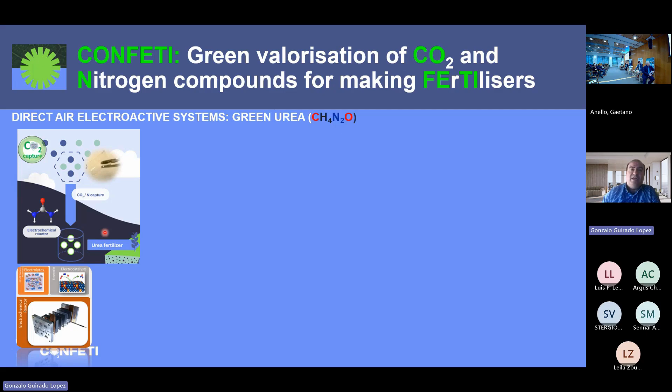So when the urea is formed with the electrolyzer, we plan to deliver this urea into the field. But before that, the idea is to trigger the electrochemical reactor using renewable energy sources. In this case, we select soil fuel cells. So we will collect the electrons from the bacteria, and with these electrons we will trigger the electrochemical device, produce urea and deliver it directly into the field.

Since it is known that not all the urea that we deliver to the field will be absorbed by the plants, we are designing a recovery system, which in principle is based on solar photocatalysis using these CPC solar photoreactors that Ilaria explained yesterday morning in the session. And for doing that, we select different photocatalysts and different materials. So at that point, we were able to make the first portable CPC photochemical reactor using sunlight. With this reactor, we recover the excess of nitrates from either leachates or agricultural wastewater, and then we irradiate with solar light and convert this excess of nitrates into ammonia, and then we can have two uses of this ammonia.

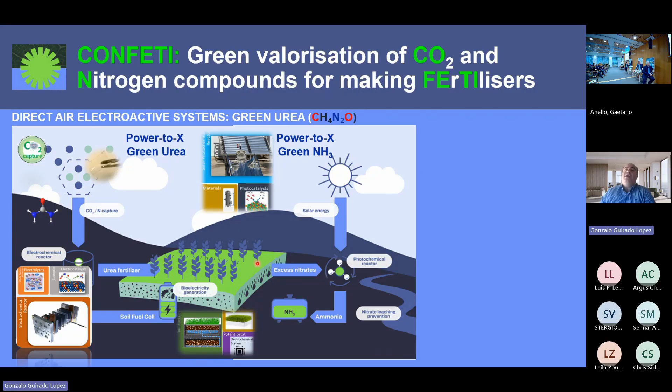Either we can just save it, or we can directly apply it to the field in order to use this as fertilizer. For doing so, we have a very nice team and very good partners, and they are doing a great job.

So we have partners from different countries, as you can see here, from 5 different countries, from Spain, France, Italy, and Belgium. And also we have an associate partner from the United States, from Iowa State University. Most of the partners are involved in different stages of the project. For instance, the electrochemical reactor that we present is developed by University of Antwerp, by the LCAP Group, with the help of CNRS and UAB.

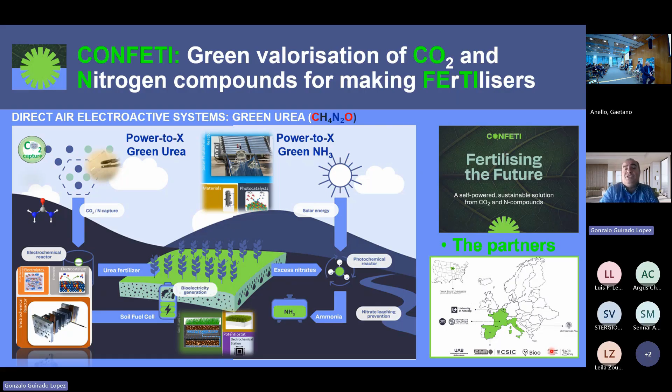The photochemical reactor is being developed in the Plataforma Solar de Almería with the contribution of the UAB researchers, and the microbial fuel cell is also performed by UAB, CSIC, and Bioo, which is a company specialized in this type of technology. So what do we expect at the end?

At the end, we want to try to produce an autonomous system to deliver and make nitrogen fertilizers. We want to do it using renewable sources. So we selected microbial fuel cells, as I pointed out before, but also, if it's needed, we will use solar panels in order to get more power. Now the use of solar power is quite a common technology in agricultural practices.

With the design of these different photo and electrochemical reactors, we will try to minimize the use of raw materials. And the main idea that we will focus on is to produce and deliver the fertilizers in situ. If we are able to do so, we will be able to reduce a lot of costs related with packaging and storage, and also with transport and spreading. So this is more or less the overview of CONFETI.

I think that along these 2 days, you have already seen how these technologies have been developing in these past 2 years, and we hope we will have a fully equipped system by June, July, before the summer holidays.

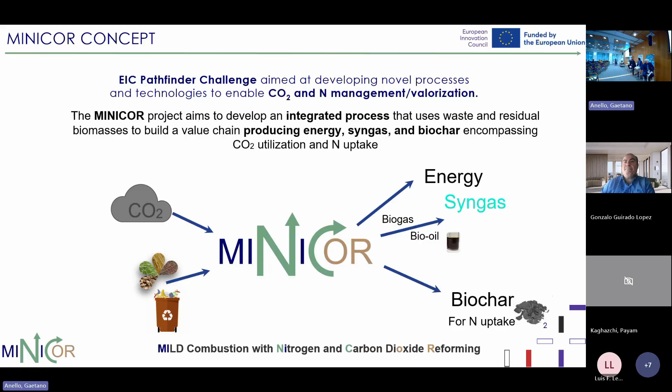What is the idea behind that, or the concept, how can it be developed? It is developed in this scheme. We start from carbon-based feedstock, also manure and so on, and we pyrolyze this feedstock with CO2, and we have, of course, 3 products: biochar, biogas, and bio-oil. Biogas and bio-oil are intermediate products, because it's very difficult to use bio-oil directly, so we process it again with non-catalytic dry reforming.

So we designed it with utilization of CO2, heating the process by utilization of biogas by means of MILD combustion. Later I will tell you more on that. And so we obtain syngas, maybe energy. On the other side, we have biochar that will be activated with CO2 to be utilized for nitrogen uptake and to be used, for example, for soil carbonization and nitrification. This is our first point that we described in the proposal.

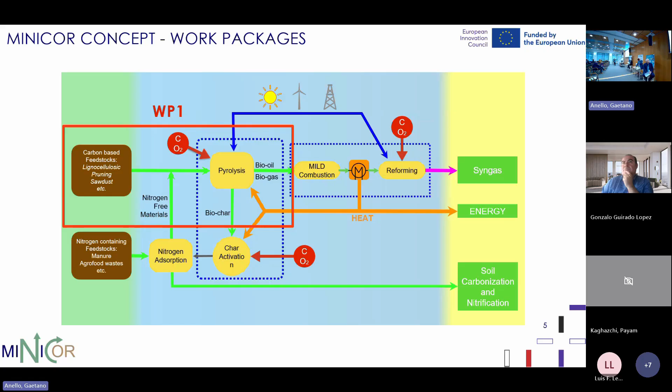But biochar, now we are looking at biochar for many other applications. So the project is divided into different groups. The first one is focused on pyrolysis, so looking at the effect of, for example, temperature or carrier gas on the products. Then on mild combustion and reforming.

And it is very important here the coupling of these two processes, because mild combustion allows us to use very low calorific value gases coming from pyrolysis without further upgrade. So the coupling of these two processes is very relevant in this case. And the other two WPs are focused on the modeling of both the pyrolysis process and mild combustion and reforming, both from a kinetic point of view and a system point of view.

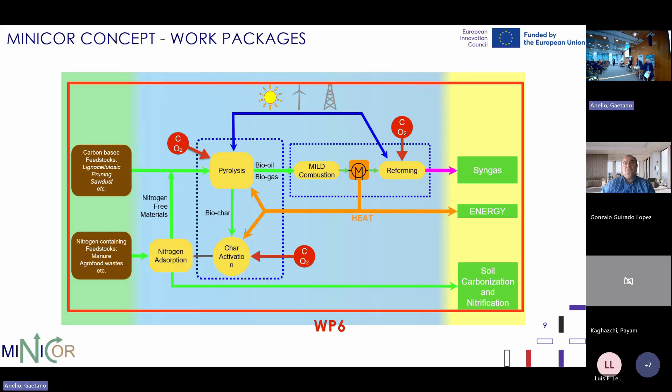And then there is WP5 for the characterization of biochar and functionalization, let's say activation of biochar. And as discussed this morning, we have WP6 late in the project, so we have not yet started that, for life cycle assessment analysis. So, summarizing the MINICOR approach?

Because we have the co-production of syngas and biochar using biomass residue, it is an efficient process with respect to resources. There is an energy integration, I mean that we aim to reach a self-sustainable process. And of course, there are some environmental advantages with carbon sequestration, CO2 utilization, and soil amendment.

From a technological point of view, as I said before, the integrated process of mild combustion with dry reforming is very important, giving us the opportunity to use very low calorific value gases. The system is flexible. I mean, we can optimize the process and maximize the characteristics that we require of the biochar or the syngas.

The other point is that we do not use critical materials; this is why we chose non-catalytic dry reforming. So that's all. Thank you.

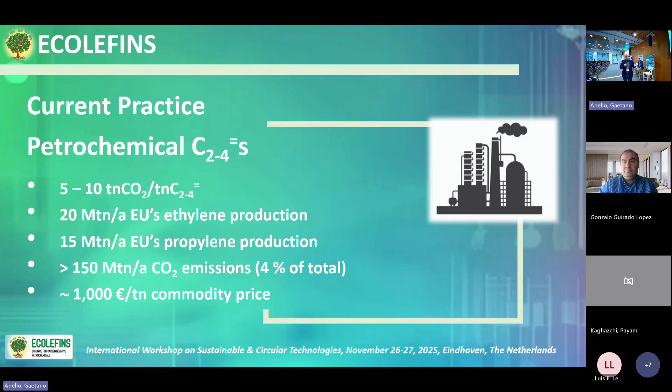So we are feeding CO2 at the cathode, and we are feeding water at the anode. And by applying a certain voltage or current, we can remove protons from the water and feed the protons through the ceramic electrolyte to the cathode, where they will meet CO2, and hopefully give light olefins, but also some other products.

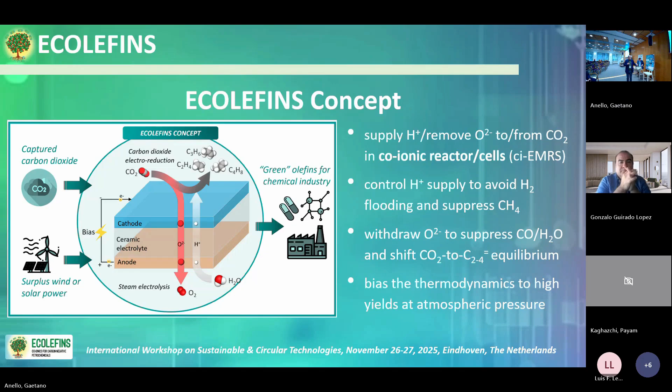So our long-term impact, if this is a successful technology, and we hope that it will become one, is to decouple major petrochemicals from petroleum and to expand light olefins production to end users, because this device can be applied in small scale applications, but also large scale applications. This is a modular technology that is easily scaled up.

At full deployment, if we imagine using this technology to replace the common practice for the production of light olefins in Europe, we will save and capture up to 20% of industrial CO2 emissions.

From some first calculations, we compared our approach to another low carbon approach, which is to have a separate water electrolysis unit and a separate compressed reactor, and we calculated that we need half of the electrical energy compared to that alternative.

At full deployment, we will need more and more renewable electricity. From first calculations, we need an increase of 25% of the total EU electricity demand. So our concept matches very much with the electrification of industry.

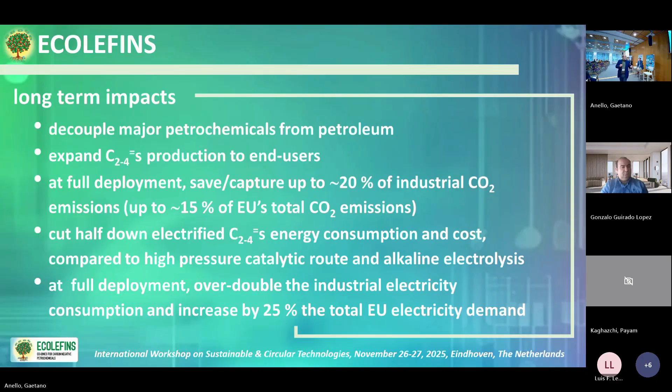This concept is planned to be realized by a wonderful team. We are 8 partners from 6 different countries. From Greece, we have CERTH, which is the coordinator, and the Technical University of Crete, which deals with catalysis. There's Hellenic Energy, the biggest petrochemical industry in southeastern Europe, Politecnico di Torino for modeling, Jülich, the University of St. Andrews for the electrodes and co-ionic electrolytes, the University of Groningen for the anodes, and Elcogen, a high-tech company from Estonia that builds the stacks we want to build in this project. So what we've done so far, and what we think are the main breakthroughs up to now...

We have developed single-phase and dual-phase co-ionic electrolytes. This means they can conduct both protons and oxide ions. This development has been guided by DFT modeling, where there is a poster in the other room from Severin Kufer from Jülich. They suggested substituting scandium into the standard BZCY proton conducting electrolyte, and we verified experimentally that we observe the desired co-ionic conductivity.

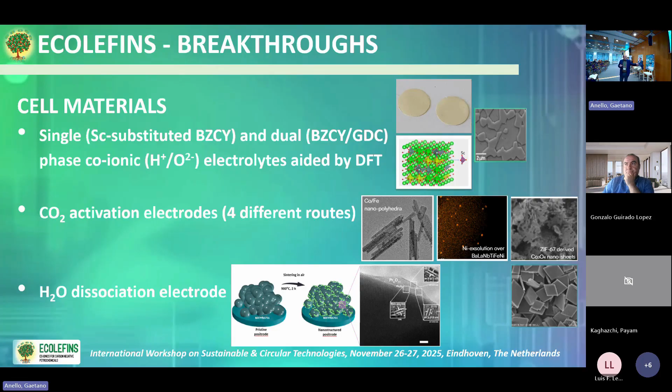Finally, we have 2 CFD simulation studies. You saw the presentation by Andrea Morenti, in order to build a short stack of 2 to 3 repeating units. And what we are also proud of is that the Jülich partner has produced, for the first time I guess, 5x5 co-ionic ceramic planar cells. This is very interesting and very important for our project.

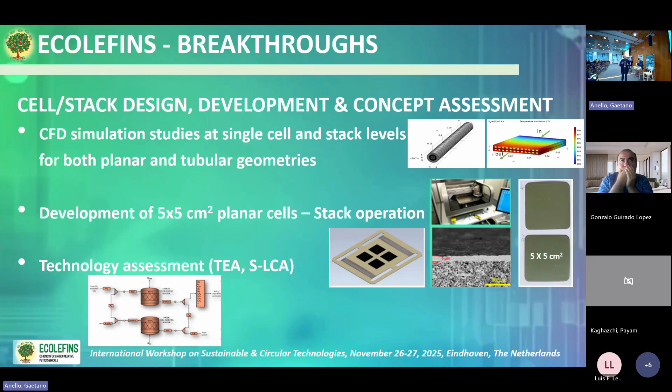And of course, the last work package deals with the assessment of the technology, which includes the techno-economic assessment and the life cycle social and life cycle assessment.

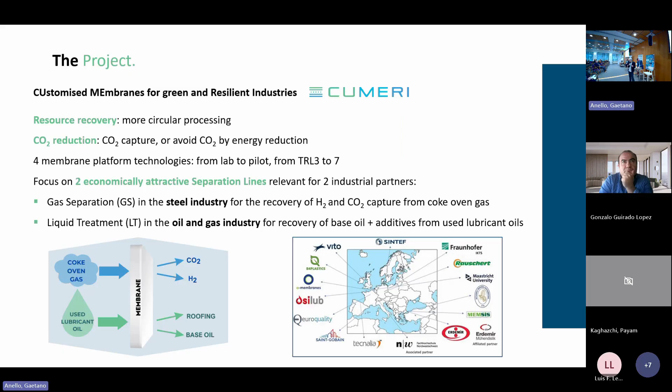Okay, let's take a bit deeper look at the two lines and the technologies I'm talking about. For the gas separation line, we intend to use the coke oven gas coming into a membrane unit with ceramic membranes that will recover the hydrogen, which can be reused for the reduction in the steel factory.

Then we go with the retentate to an oxy-combustion, and this produces a gas with quite high amounts of CO2, which is perfect to go into polymeric membrane modules for the CO2 capture.

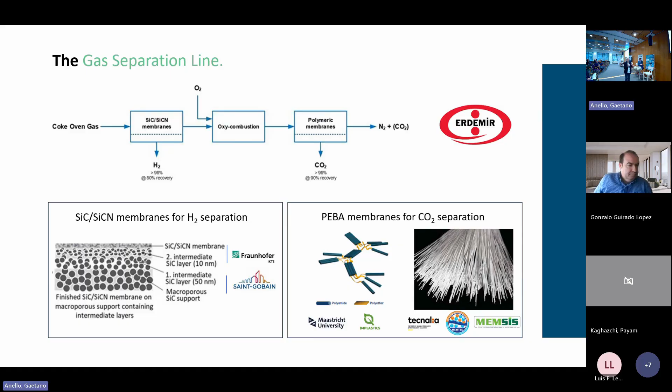You see the developments on the silicon carbide nitride membranes for hydrogen separation. It's a collaboration between Saint-Gobain, who develops the membranes, and Fraunhofer IKTS, who develops the top layers of these membranes. For the polymeric membranes, we have Tecnalia working together with the University of Maastricht for the tuning of these polyether block polyamide membranes, specifically for CO2 capture. They also want to bring them into hollow fibers instead of flat sheets, to profit from this design.

For the liquid line, we are working on used lubricant oil that is nicely collected in Europe. We thought first that we needed a pre-treatment, which turned out afterwards not to be necessary. So we remove the water in the UF plus membrane extraction steps afterwards.

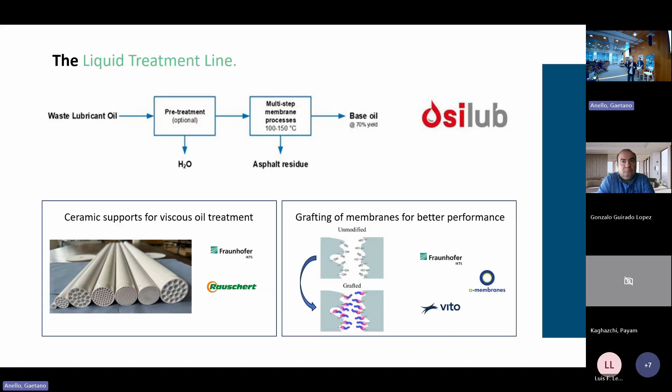We have been looking at the support materials from Rauschert, and we can tune them with Fraunhofer, but it was actually not needed to change these. We did look a lot into different grafting techniques, and we scaled up some of these techniques to get the best membranes for this application.

We started in December '22. We are now three years forward. We still have half a year to go, mainly focused on the gas separation piloting. In the beginning of the project, we did some preliminary economic and environmental analysis, and then we developed the different materials and membrane platforms, selecting the right ones for the applications mentioned. We are now more or less at the end of the upscaling.

We already did quite some testing in piloting in the liquid line, and the gas separation line will start very soon. With the results coming out, we will revisit the LCA and the economic evaluation. I think this was my presentation.

And now we have Martin. No. I'm... representing, yes, let's say it like that. So, yeah, but I don't... I have the other name. Yes, it's the Iconic project, yes.

So, Ruud Kortlever, I'm associate professor at TU Delft. I'm not the project coordinator, as you already know. Project coordination is at ICFO in Spain, Brian Garcia is the main program lead. But I'm representing the project today, so I'll give you a very short overview of what we are doing.

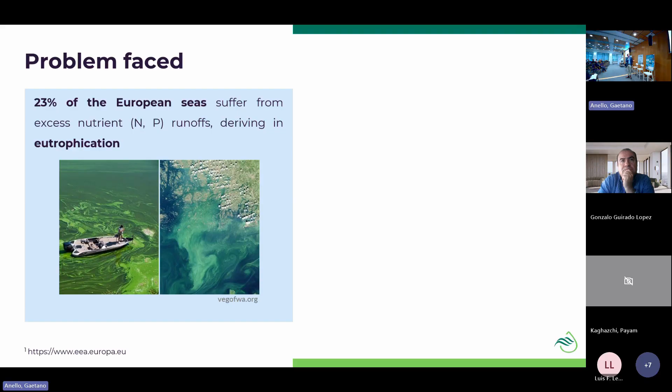The problem we faced: a lot of European seas suffer from an excess of nutrients, nitrogen or phosphorus-based, leading to eutrophication. At the same time, we are currently making fertilizers in a very energy-intensive way that also causes a lot of CO2 emissions. Two percent of global CO2 emissions come from the Haber-Bosch process that makes ammonia, and with ammonia plus CO2, you make urea.

So what now if you could use waste streams, such as this contaminated seawater, and convert that directly into the end product, urea, as an artificial fertilizer? That's the main goal that we want to achieve.

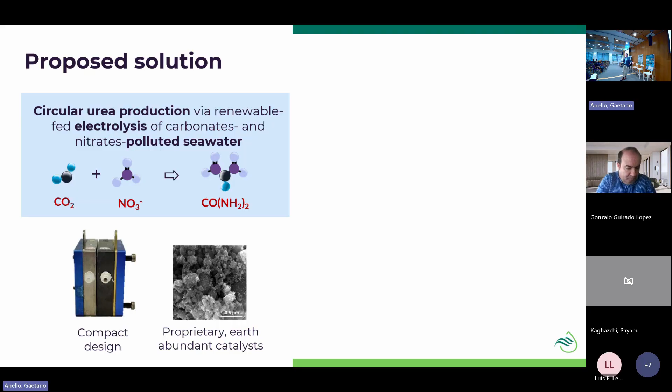In Iconic, here you see the proposed solution. We use an electrochemical cell, so it's an electrocatalytic process. You can make decentralized units that can convert our reactants into urea, initially starting from CO2 plus nitrate. Eventually, at the end of the project, we want to use real contaminated seawater streams containing carbonate, converting the carbonate with nitrate to urea.

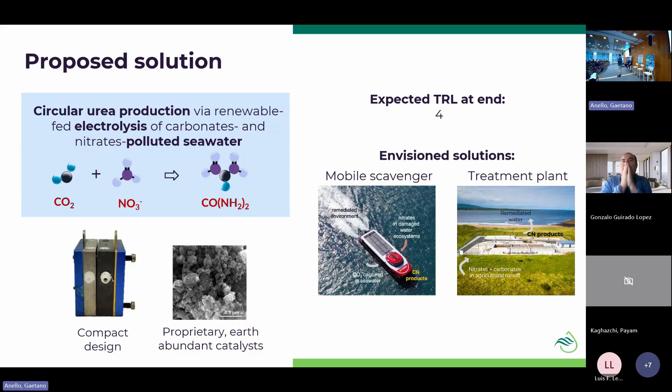The envisioned solutions we are aiming for - not directly at the end of this project, but this should lead to the base technology - would allow a treatment plant that could convert contaminated seawater into a fertilizer.

So in this project, we are developing catalytic materials, developing the electrolytic cell, and trying to understand the fundamental way this reaction actually goes. At the end of the project, the main deliverable is a prototype that can use a real contaminated seawater stream and convert it into urea.

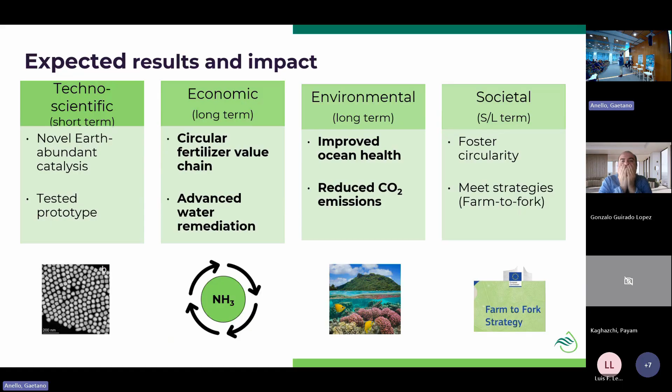Now, of course, the economic and environmental impact already mentioned. You want to go to a circular fertilizer value chain, and then, of course, can also improve ocean health to reduce CO2 emissions.

Let me put this up as well. These are the answers to the possible questions, I guess. Okay, let me change the question then. So I have the questions that you also have, but I want to change a little bit because this morning I was not allowed to ask a question, which I'm still waiting on. But no, it's true, and I was impressed.

I want to start with Anita first. Yes, Gonzalo, you hear us? Yes, yes, okay, so I will have some questions for you too.

I want to start with Anita because I was impressed by the fact that you have a work package of 6 months doing LCA, and then you say we did the material based on the results of this work package. So how did that work? Because in many projects the LCA is done at the end.